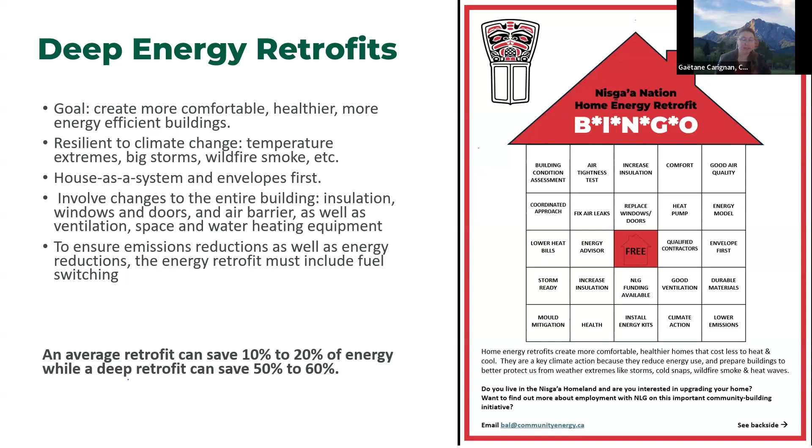So the Akisqnuk retrofit journey was really interesting. It was a really holistic approach, and they are right now working on a case study that they're going to be presenting at their summer annual general assembly. I'd be happy to talk about that at an upcoming webinar through Fraser Basin Council. I have permission from Akisqnuk to talk about that, and if we have a chance later today, we can chat. But really, the two main presenters are going to provide us lots of things to think about without getting too deep into that. And then I wanted to mention this other upcoming event.

So there's a Northwest Energy Retrofit Forum. It's a collaboration of Building Legacy North and Nisga'a government. I'd like to invite you to join us. We're going to be having panel discussions and presentations from many different building science consultants and experts who have worked in the space. I'm really excited about this event. There's going to be a tour in Nisga'a Nation with the consultants and invited guests. And then there's going to be two more days where we're going to get these consultants talking about their different approaches and considering Nisga'a Nation's context, which is going to need hundreds of homes retrofitted over the next few years.

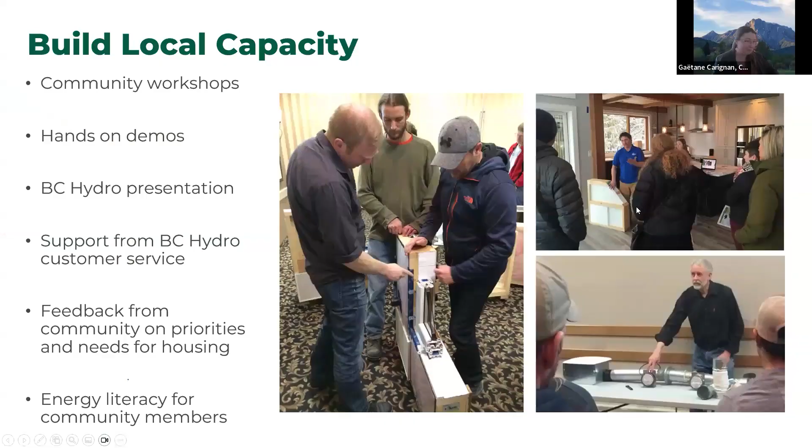Great, thanks, Gaëtane. And you'll just as the host, you have to give Karim the co-host abilities there. Thank you. No problem. Okay, thanks for that. Okay. Yeah, I'm just trying to share my screen. I'm just on a.

Okay. Thanks for that introduction, and thanks to CA for hosting today. Yeah, honored to be next to Richard Hall, a legend in the space. So really meaningful for us and our team to be considered experts here, and really excited to share a little bit about our philosophy and our approach to this work.

We're calling this Beyond the Energy Audit because over the last 15 years, we really started our work in energy efficiency and doing energy retrofits and deep energy retrofits. And as we did more and more of this work with our partner nations, we really saw that, as the stats we heard earlier, there really is a housing crisis, not an energy efficiency crisis. And so our work really evolved from focusing purely on energy and moving to focusing on housing in a more holistic way. So I'm excited to share a little bit about how we approach that work and give some examples of the kind of things we think about as we move forward in that journey.

So for those of you who don't know me, I saw some familiar faces on the chat already. My name is Karim Abraham. I'm the CEO at Community Power. I live in Coast Salish territory, specifically on Coquitlam ancestral land, and really grateful to live and work and play in this beautiful place we call home.

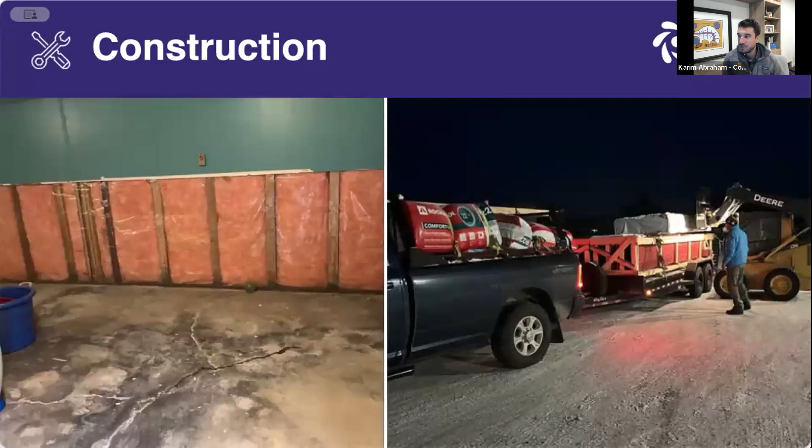And so this is where things get fun, right? This is when we start to repair homes, here's a couple examples of late night deliveries of insulation and starting to get to do the work. Here's a few kitchens that we've been a part of the construction in Takla Nation. And so this is where we really start to see the benefit and the impact to the families and people living in the homes.

This process from assessment to construction can take anywhere from 9 months to 18 months to get to this point. So it can be a long process. We try to speed it up as much as we can, but there's a lot of folks that need to be involved in this. So getting to this point is really a huge milestone for the team.

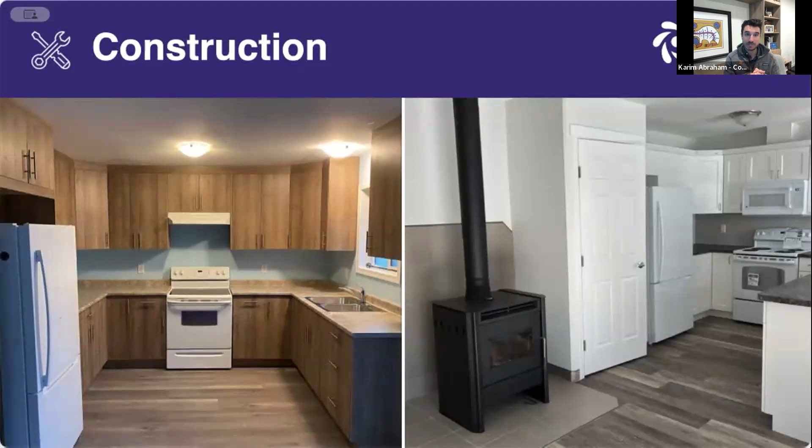And so then as part of this construction process, we want to make sure that we're doing QA. We want to make sure that we're training folks as much as we can. Are there either folks in the administration that want to learn how to do project management, or again are there trades or youth that want to be involved? How do we get the residents excited about this? What kind of community engagement do we do? What do we do with waste? How do we manage all of the construction waste that gets created as part of these works?

So again, it's about understanding that there's a large iceberg under the work of construction, and having a team that can manage and adapt to the work is really important.

I'd say nothing is going to go perfectly right in remote community construction. There's always going to be hiccups, there's going to be things that go completely off the rails. But if you've got a team that is adaptable, that has experience, you're able to right those wrongs a little bit easier. So again, we'd say it's really important to build out a team that understands, that can be adaptable and that can roll with the punches that are inevitably coming.

Okay, I know I'm almost out of time and happy to answer questions soon. I've got a few more slides about some of the work that we've done specifically in Takla Nation.

Takla is one of our recent and really rewarding partners that we've worked with over the last 5 years. We've done a ton of work there. We started in 2020 doing housing assessments, holistic housing assessments. We then supported in building 7 duplexes, or 14 new units. In 2023, we also started repairing or doing renovations on 23 homes. We then started building 10 new modular homes, and we're currently in the process of working on additional renovations for 2024. So as of today, with 24 new units in the community, as well as renovating 23 existing units, it's almost half of the homes in that community we've had an impact in, and that is why we do this work.

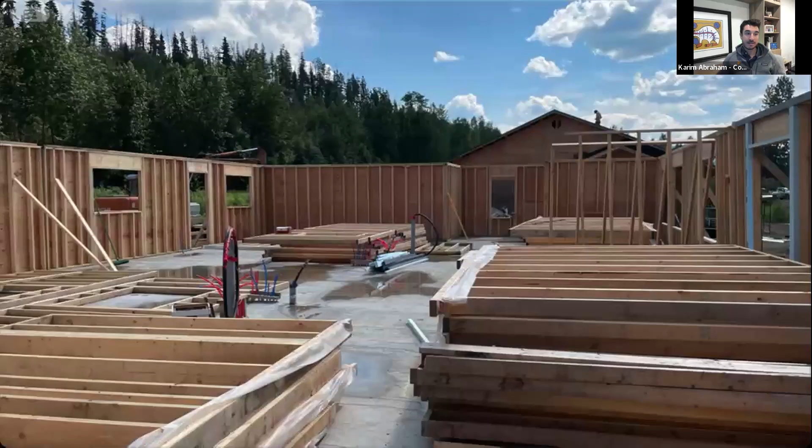Here's a great photo of one of the duplexes being built. And so this is a hydronic heating system in the concrete slab foundation, and all of the work was done by a local contractor relatively close by. And so that was a really great partnership between ourselves, Wildland Construction, which is the nation's construction company, and the nation itself.

So as I mentioned, the housing renovations went through this same process. So we assessed and prioritized 23 homes. $1.2 million was secured through ISC. We had a mix of local and external contractors do the work.

That was completed very recently, again a partnership between a multitude of stakeholders. Really proud of that work and the impact we've had in that community. The funding was provided by ISC, CMHC, the BC Indigenous Clean Energy Initiative also funded some of the initial energy planning, and BC Hydro as well. So thanks to all the sponsors and funders for that project.

Almost done. This process I outlined, going from assessments to prioritizing to securing funding, we've found that having this path that we know works, with key outcomes and milestones at each stage, has really resonated with our partner nations. We're currently working with about a dozen that are going through this exact same process. Really rewarding to see how well this is being reflected, and because there's funding available for the assessments to understand what work needs to be done in each home, there's a ton of interest in this approach. Really grateful for all of our partners.

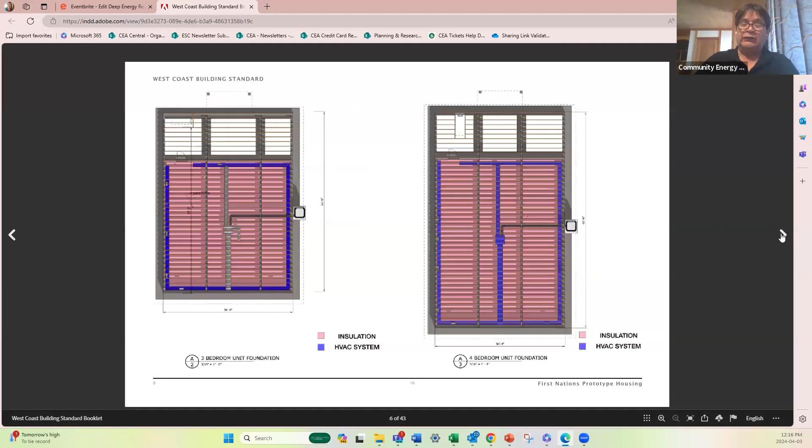I put it together and created the booklet, then worked with the building science people to create building science features that are simple concepts, affordable concepts, that are now showing the real true cost, not only to construct but to manage over the day. When I say managed, most people pay $12 to $15 a day for the operation of their home, and this home design is costing us $1.50 a day to run.

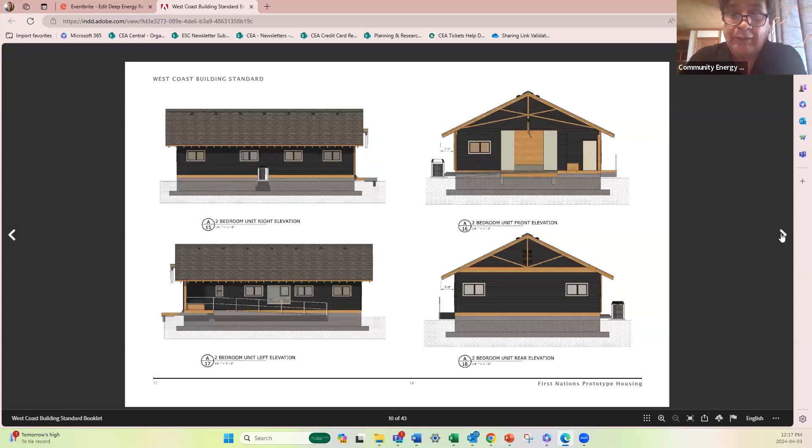So what are you going to do? Pay $15 a day or $1 a day? But build a team to support it, and build the education for it. If you go back a few pages...

We've also created educational videos for children, to reconnect the children to the adults and adults to the children. I'm a survivor of the residential school system, so I know what happened there, and I decided to reconnect the children to adults and adults to children. Most people alive today have experienced the same trauma I experienced, but I chose not to live there, and instead do something different.

In the booklet, if you go to the drawing - stop at that one, I think the cultural component there. It's a cultural kitchen, and I'll give you an example why a cultural kitchen is important.

For the west coast of BC, I used to walk in the homes in the social housing program, and the kitchen on the west coast - people would be boiling water, boiling fish, preparing their salmon in their beautiful kitchen, and that lasted for 3-4 years, and then they'd have to do renovations to it.

So I designed a cultural kitchen, an access way to that cultural kitchen. All you see in gray is made of material that best manages moisture, and what you see in the drawings - all the plumbing is centrally located, so you minimize your costs.

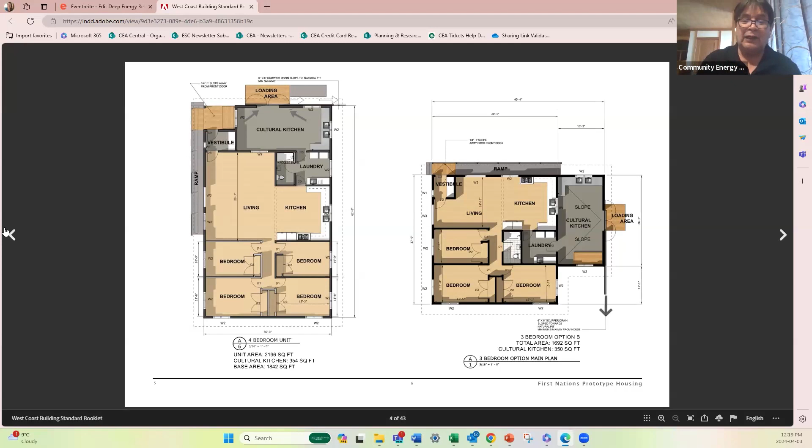It's also designed - if you go back a couple pictures there, Gaëtane - designed with two spaces. One more, sorry, other direction, right there in the pink. Those are designed and conditioned crawl spaces that complement the living space. Then I have a designed attic space that complements the living space.

So for us here on the West Coast in Bella Coola, we're not connected to the grid, so we have a forced air system, diesel fuel, interconnected to the heat pump, which is your heating and cooling system for the home. And you see the white part there is pretty much semi-conditioned - that place has got access through the white square there on that left side.

That is a little stairwell to the storage space below that. So, but it has many features.

I had to create a work document for the features. The material selected was to manage mold, the design, the interior design concept were also to manage contractors, so we didn't need to hire people to come in to do our mudding. We created a formula to minimize that altogether. And of course, the room sizes we use 12 by 16 specifically because the material we're using to complete the ceiling is not drywall, it's spruce, pine, fir, or cedar.

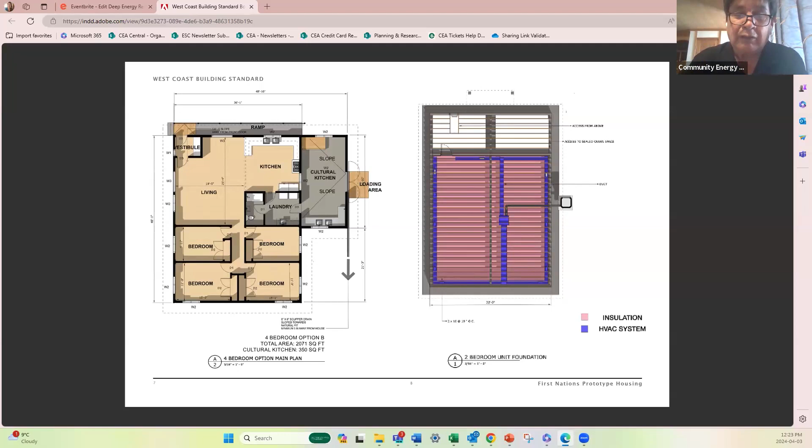Minimize your costs overall. If you go down to the elevations, you go down to the elevation, Gaëtane. I'll stop you. But right down one back, 2 back.

Yeah, you look at the elevations and you see the door. There's that door there. I don't know if you can see my cursor, but there's a door there. It's wheelchair accessible. It has a window on top, so we create a lot of our own passive flow ventilation in these homes. You see where the door swings open, and there's a wooden strip.

That's a door stop. And you look at the beam, that's a beam cut from our woods, but there's a lot of features that I need to go through. But it's self-explanatory in the booklet and the Word document I have to support it.

And we found that the home design was scrutinized by BC, and I welcomed them to scrutinize it and to help me build a better booklet. And they did. So we found the carbon footprint of the home design was average when they did an assessment of it. Now we got it below the national average of carbon footprint, which means off-gassing materials are user-friendly.

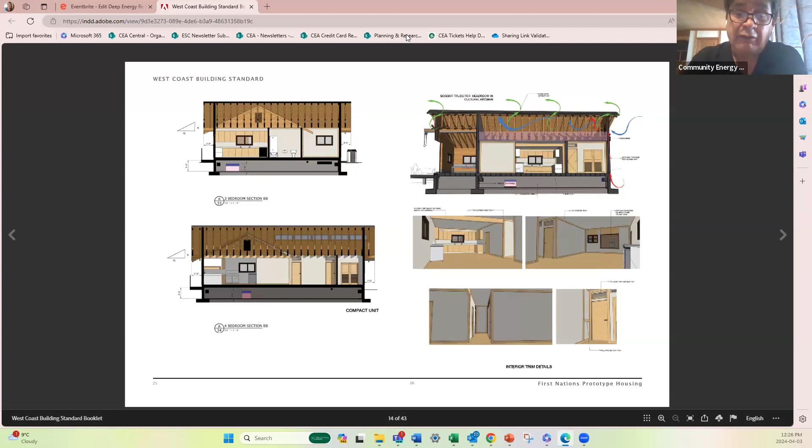Not mine. This is just a template that I created, and I got nothing to hide, nothing to lose. It's my experience of 38 years. And I put a pen to paper, simple as that. For all. Thank you very much.